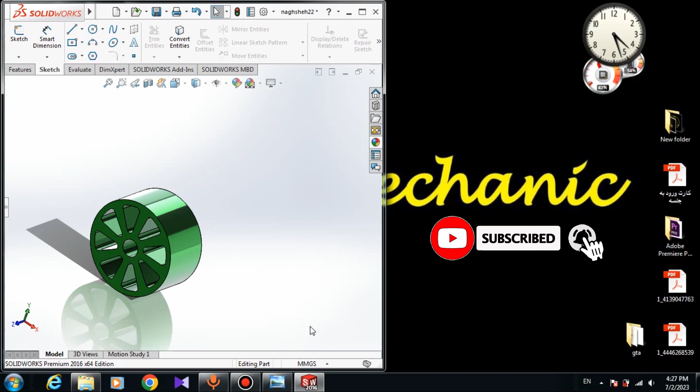Here I have the dimensions, and we have to draw the circles, and here we have to draw the lines, and we will apply the relations. It's gonna be very easy. Now I have to close the model. For closing the parts, just come here and choose close.

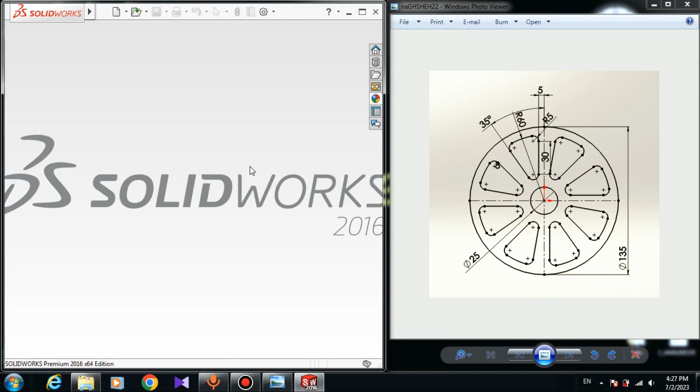Don't save, okay? And now we have to create a new part. For creating a new part, just come to new part, okay? Now we have a new part. Our part is open, and for drawing the sketch we have to choose a plane. Here we have three planes: front plane, top plane, and right plane. And we can create planes in the future, and I will tell you what's the use of these planes. But for now, just click on the front plane and choose a sketch.

Now our sketch is open. We have an open sketch. First things first, we have to draw a circle. So here I choose 2-point circle. 2-point circle means that I can draw my circle with 2 points, and this type of circle means that I can draw the circles with 3 points. It doesn't matter which type you use, but I'd rather use a 2-point circle.

We always start with the origin point. As you can see, when I move my mouse, an orange point appears. It means that if I click on this point, the center of the circle will be connected to the origin point. So I draw a circle. Then we have a smaller circle here, so I draw another circle here. Right click, select to exit the tool.

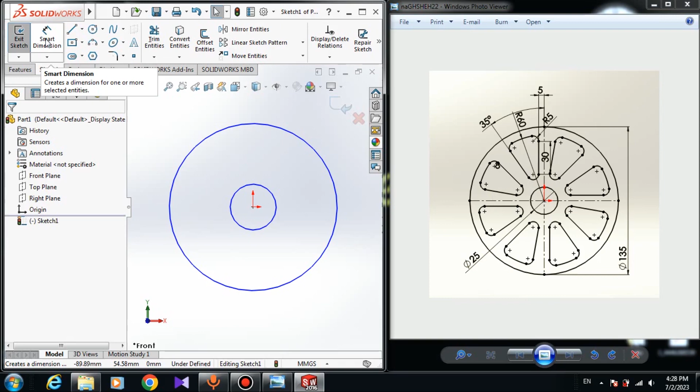The dimension of the bigger circle is 135 millimeters. So here I choose smart dimension and I give the dimension of 135 millimeters. And the dimension of the smaller circle is 25 millimeters. You can see the color of the circles has changed to black. It means that our sketch is fully defined, and I can't move my sketch. When your entities turn black, it means that your sketch is fixed and everything is perfect.

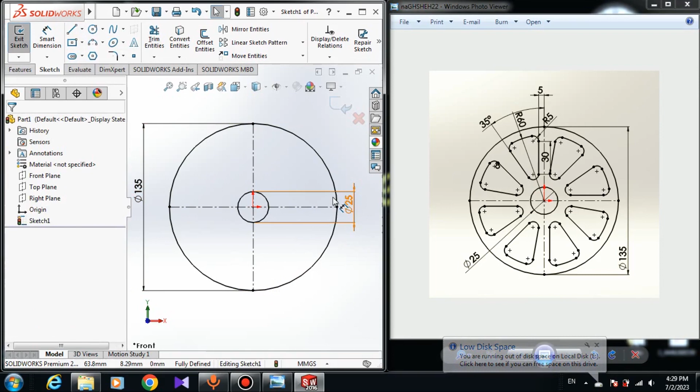Now we have to draw two center lines that are perpendicular to each other, a vertical center line and a horizontal center line. So here I choose center line and I connect this side of the circle to this side of the circle. I right click and select to exit the center line, and again I choose the center line to draw a vertical center line. So I connect this side of the circle to this side of the circle and right click and select.

And now we have to draw these things here, and we will pattern these lines around the smaller circle. So here I draw an arc. This thing here is an arc, and here we have two arcs, and here we draw two lines. So I draw an arc. The center of the arc must be this side of the sketch. Please be careful. And right click, select.

The center of the arc must be merged to the center of the circle. So for doing that, just hold the Control button on your keyboard, choose this arc and the circle here and give it a concentric relation, and the centers will be merged. Now move your arc a little bit, choose smart dimension, and the radius of the arc is 60 millimeters, and okay.

Move your arc a little bit, and here choose a 3-point arc. I mostly use 3-point arc; as I told you before, it doesn't matter which type you use, but it's much better to work with. So I draw the arc from the orange point here, and I draw a 3-point arc and an arc here. The center of the arcs must be inside of the circle. So select.

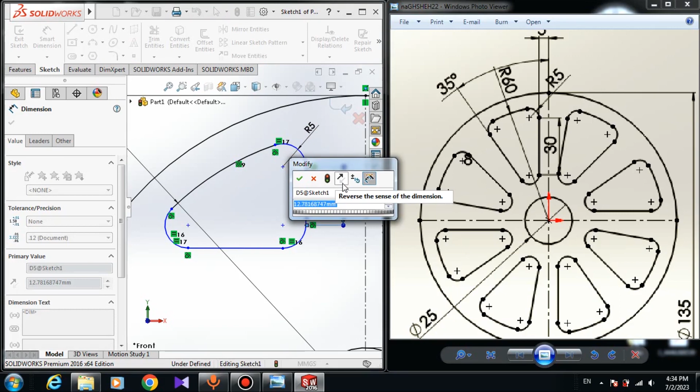My sketch is not fully defined. You can see it is moving because I have to give this line a dimension. The dimension of this line is the dimension of the line here. Press the escape button on your keyboard if something like this happens, and give the dimension of it as 30 millimeters. The angle of this line is 35 degrees.

So here I give the angle of 35, but our sketch is still not fully defined because it is moving. Choose the smart dimension and give the dimension from this point to the center line here, and it is 5 millimeters. You can see the lines have changed to black, and our sketch is fully defined now.

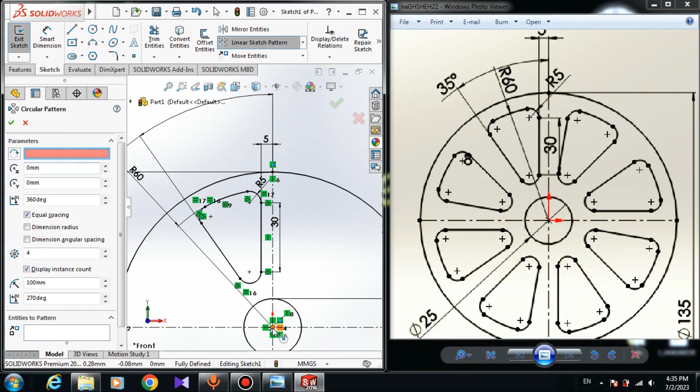All we have to do is pattern this thing here. I choose a circular pattern because I want to pattern this around the circle. Choose this parameter and choose your origin point. Here, entities to pattern: choose your entities, the line here, the circle, the arc, and this one, and this one, and this one.

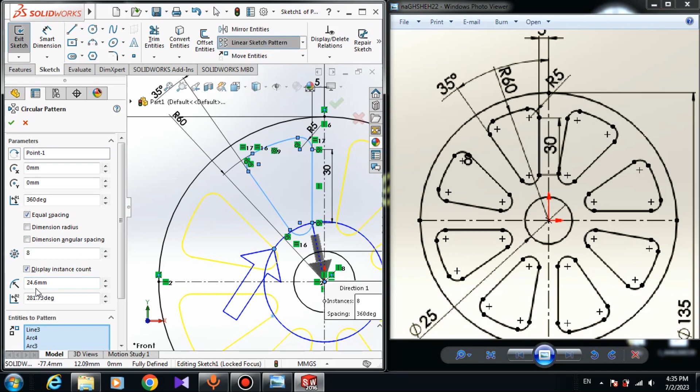We have to pattern eight lines and arcs, and here are the parameters: it must be 360 degrees, it must be 8, it must be 24.6 millimeters. So here choose OK.

Now it is patterned around the circle. We have drawn our sketch, and all we have to do now is extrude the sketch.

Here come to feature and choose extrude boss and base, and you can see it automatically recognizes the areas and will extrude them. So you can give it a depth of, for example, 60 millimeters. And okay, now we have the model.

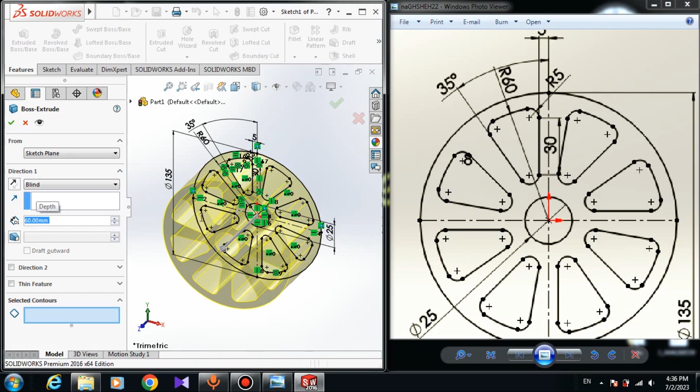We have the 3D model. It was a very easy sketch.

Now you can change the appearance. For example, here in edit appearance, you can change the color, for example to green. Or you can change the material.

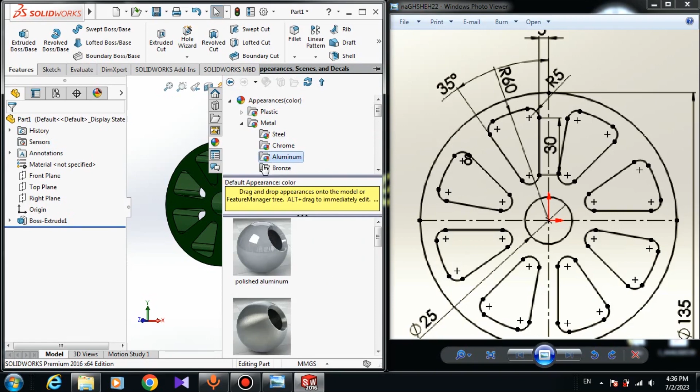So here you can come to appearance and, for example, give it a polished aluminum material, and you can change the color, for example to green or other colors. So here we have the model.